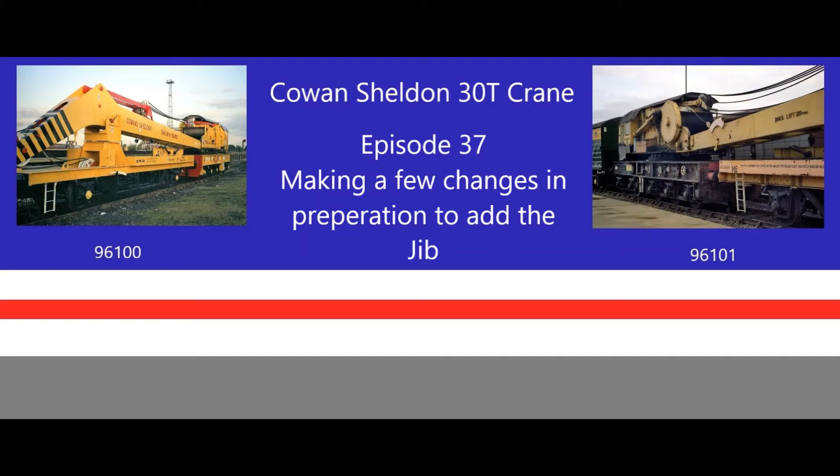In today's lesson I'm going to add, I think, one small detail left to add onto the runner wagon, and then we're going to start setting things up and moving a couple of things, changing a couple of things, so that we can start to look at drawing the jib.

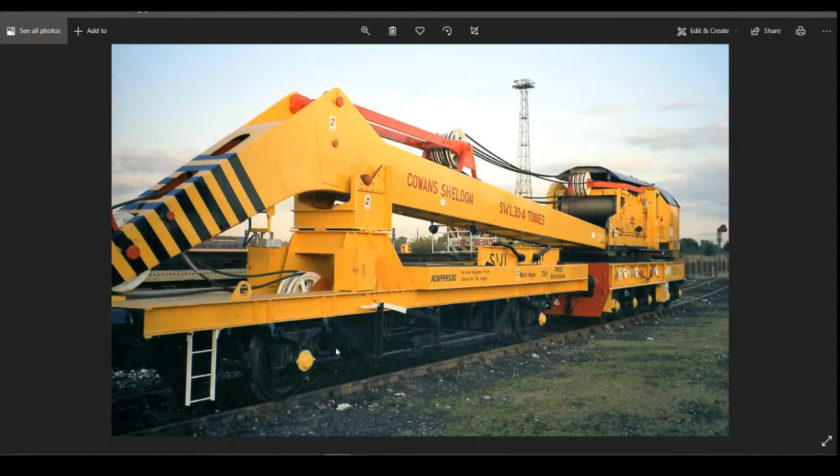So if we start with this small addition to the runner wagon, just up here there's a tiny little plate that the end of the jib sits on. I'm just going to draw that quite simply, making sure the runner wagon's turned on with the radio button, looking on this top surface, and then we're going to draw it. I don't know if there's actually... no, it's not on the sketch.

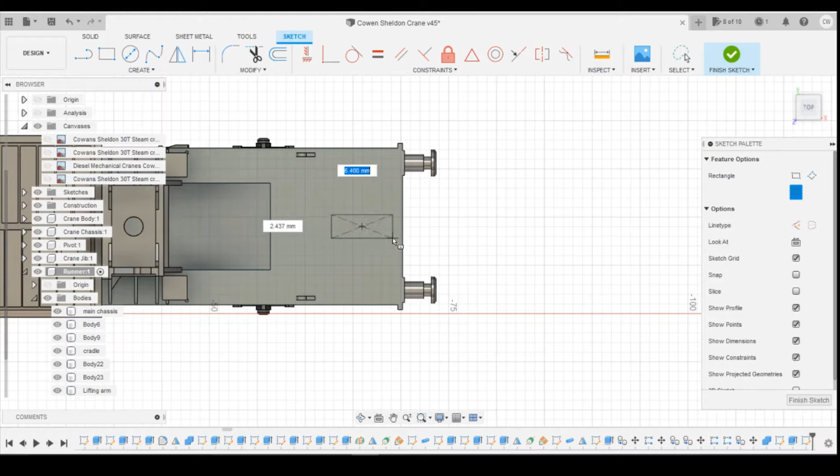So we're going to find the midpoint between these two, and then we're just going to draw, if we use a center point rectangle, something this sort of shape. Go with 4.5 millimeters by 2.5 millimeters, and then we'll define its position.

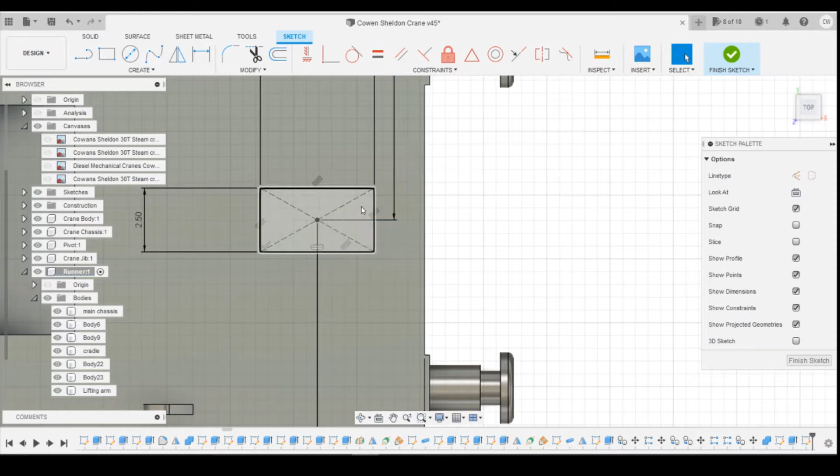Just extrude this up slightly. I think I'm going to go about 0.3. So that's a nice and simple little addition there.

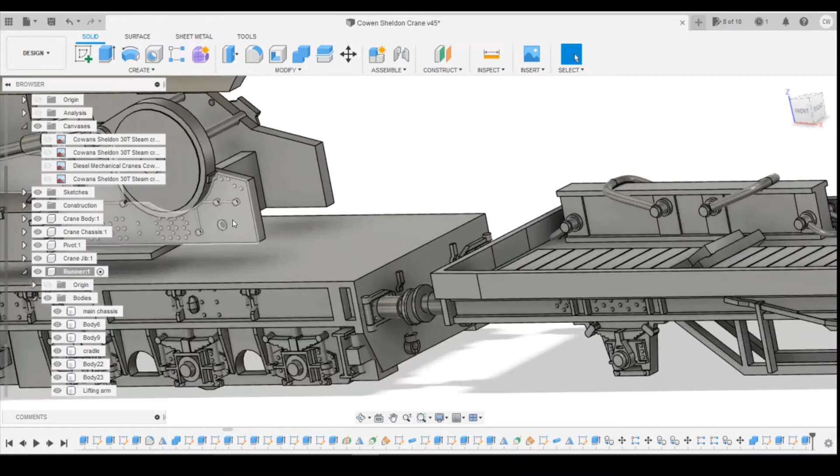Okay, so now the next thing we're looking at doing is, I'll say, setting things up for the jib. Now this here that we've drawn, this circle, is the mounting point of the jib. If we look at the plan, you can see where it's pretty much in line there. Underneath the body we've got like a slung down section here. And then obviously the jib runs across, and there's a little lug that sits in this like a catcher.

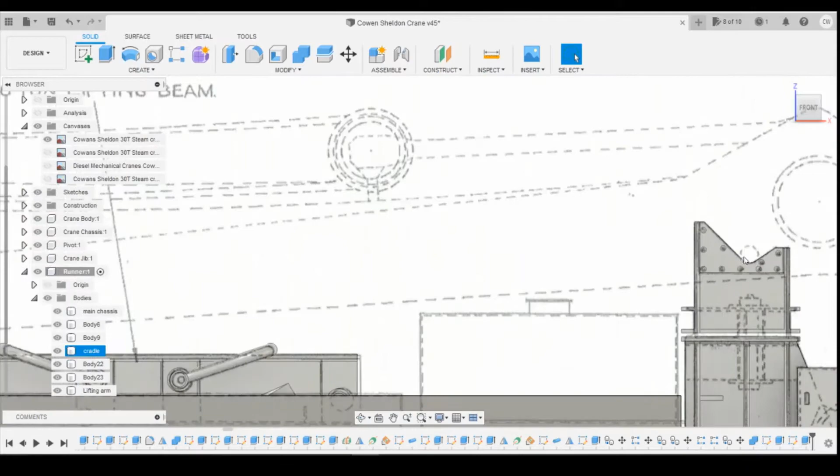Here that we've drawn. Now the issue that we've got, and the issue with the comparison between real life and modelling, is in real life these buffers are touching, which is where the plan is and how the jib's designed to sit. But obviously when we're going to look at modelling, we're going around much sharper corners.

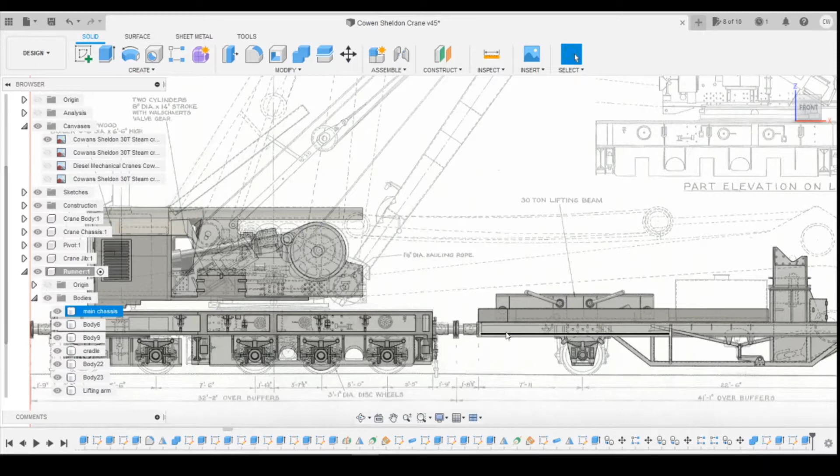We've got different types of couplings that we need to accommodate, so we're going to have to split these wagons apart and give ourselves a little bit of room between the two wagons, which unfortunately is a bit of a pain, but it's going to mean that we're going to have to extend the length of our jib, so it's not going to be a scale length to the actual model. So we're going to have an extra bit in this middle part here.

So what I'm going to do is I'm going to move the runner up by 5 millimeters. So I'm going to select all of the bodies within the runner component. That one.

Okay, let's edit this one before we do that. That should have been joined there.

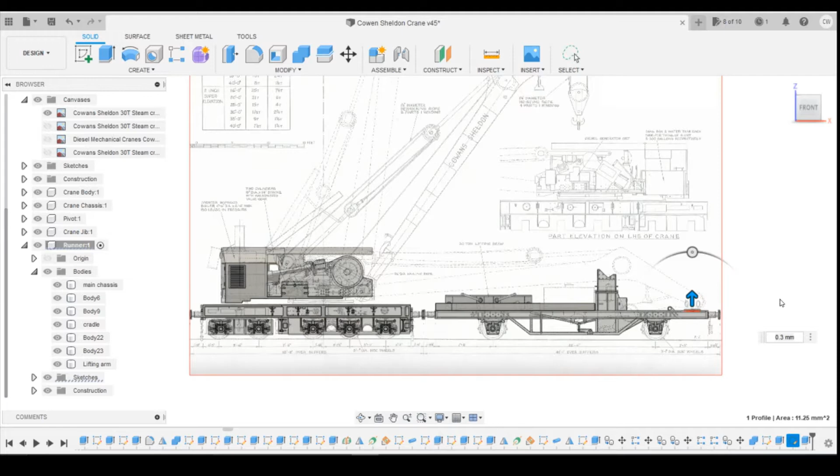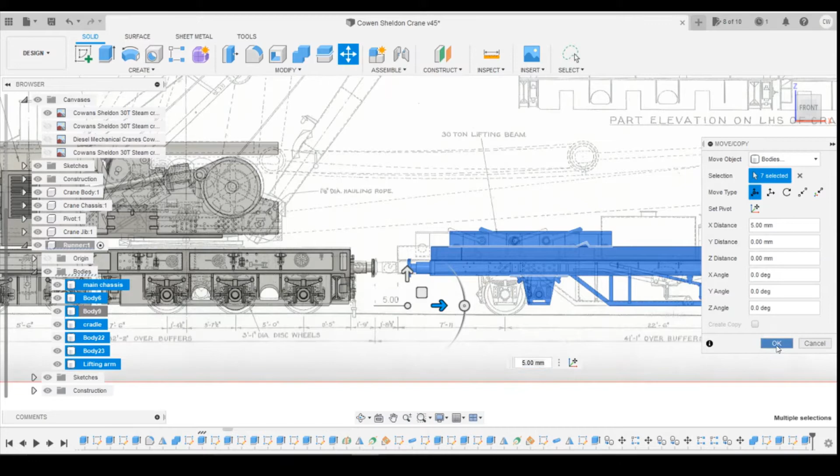Okay, so we're going to select all of these components, and then we're going to right click and then move. I'm going to move them up. I think that we're going to need about 5 mil separation, unfortunately, just so that we can have the swing to go around corners. And then obviously that's going to mean the jib's going to be 5 mil longer.

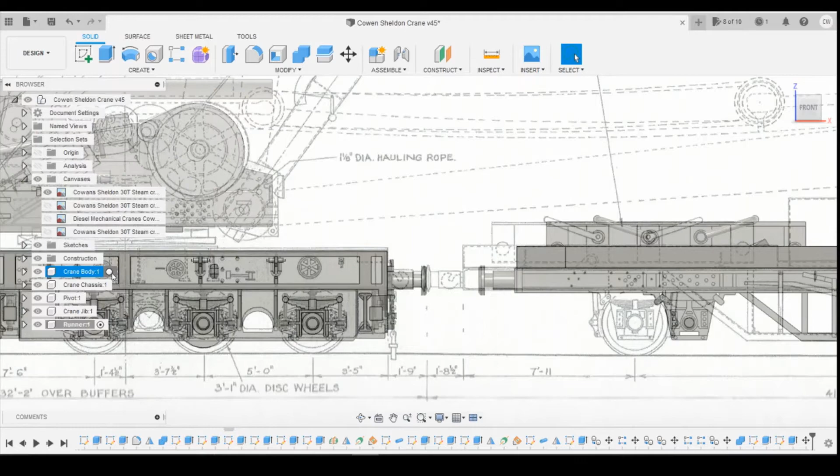Okay, so the next thing I'll do is draw these two bits on the bottom of the main cab body here. So let's select the crane body, and then we'll draw them.

Let me just tell you what I'm thinking with the jib as well. I'm actually thinking of not affixing it to the body here and not affixing it to the runner.

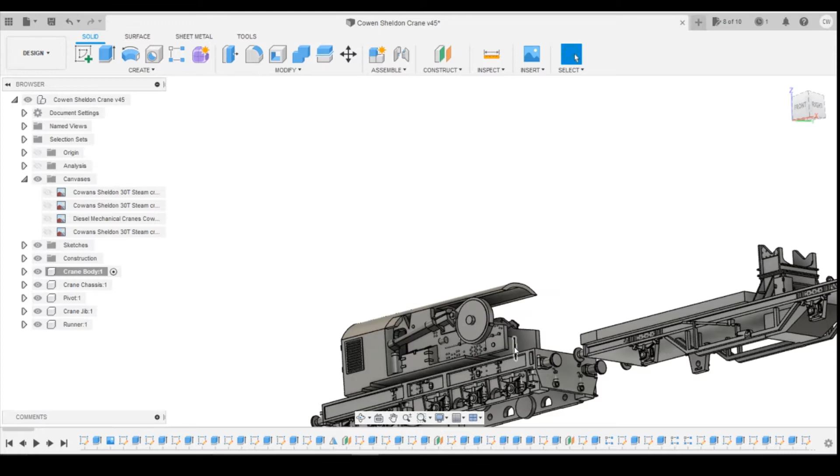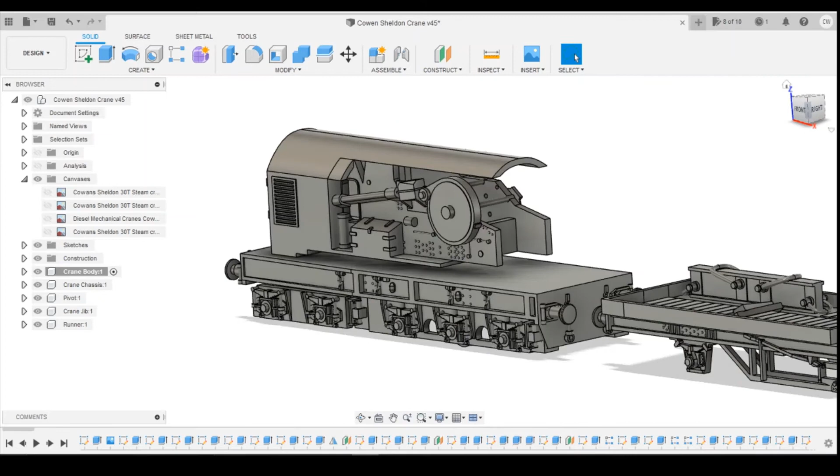Have it sort of floated so that as these two wagons compress and separate, it's not going to be putting the pressure through the pin that's holding them here, and it actually allows the jib to slide backwards and forwards within the body. I'm just thinking of having a little plate on the bottom here that's flush with this, and that whole jib can slide in and out slightly. It's not going to be able to move far enough that it comes all the way out, although if you need to, you could take it off yourself, but it's just enough to give it that little bit of play within the whole model.

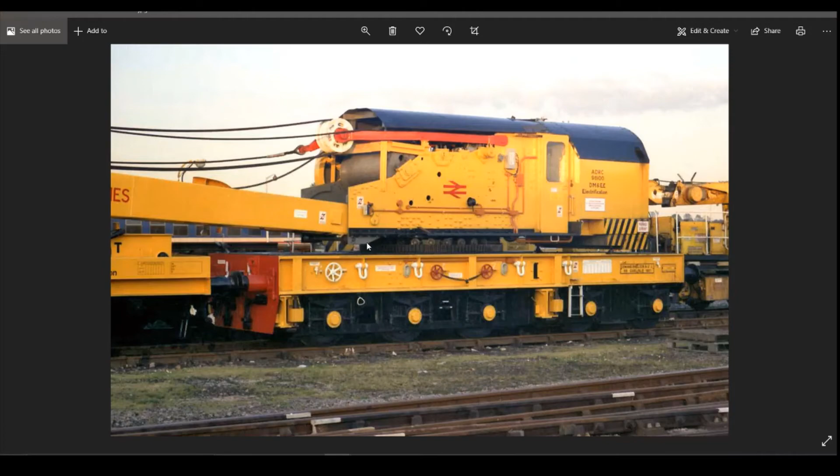Okay, so let's draw this little extra bit on the bottom here. I'm just going to create a sketch off of, if we look at the picture for reference, on the bottom of the body here. So we click the side of the body here, and we're going to use the line tool.

We're going to come down 0.9 millimeters, and then I want to come up roughly where this is here. I'm going to try and pick an angle that looks similar to what's on the drawing, about there, and then a line across there. Let's define that angle and define the distance between those 2 points.

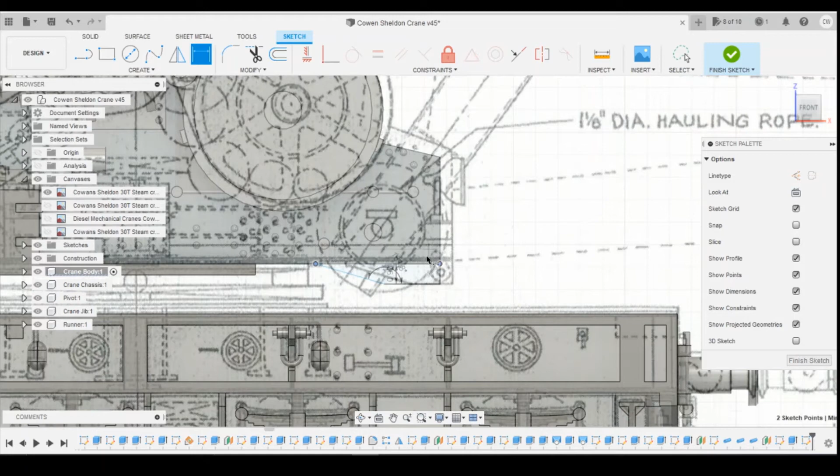Okay, and then in real life, this is just like a little plate where it hangs down, and it's hollow in between the frames here. But I'm actually going to, as I say, fill it all the way in so that we've got something for the jib to sit on.

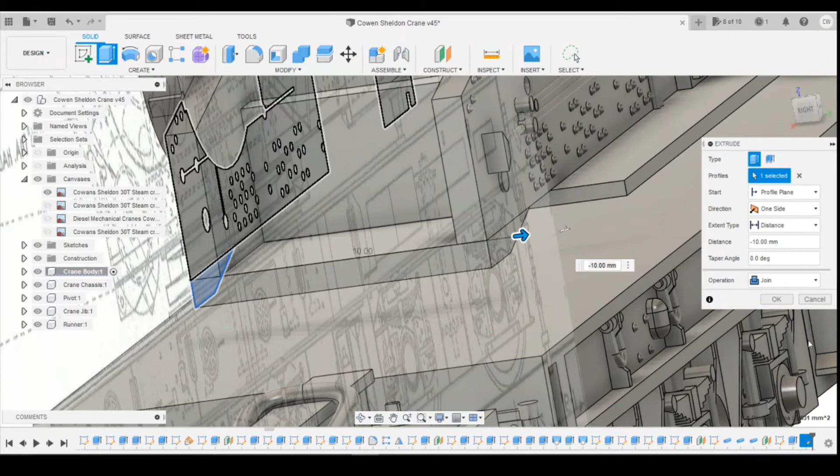So make sure you've got the radio button checked for the crane body, join, and extrude that across, and then the jib can sit in like a little pocket here.

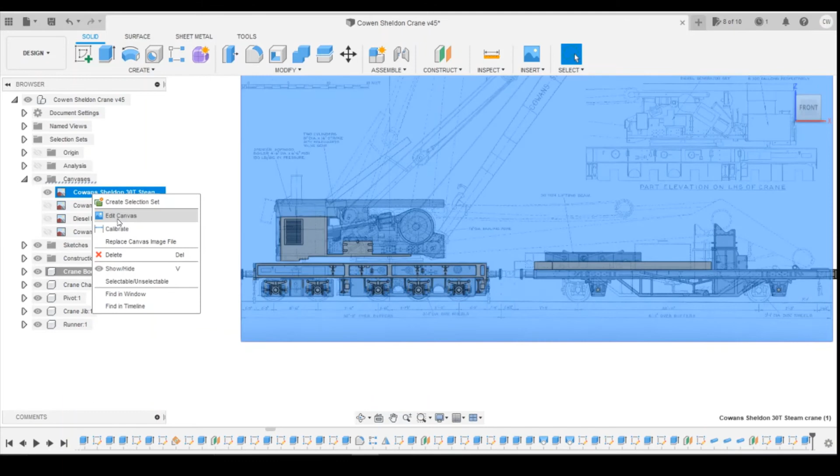Okay, and as I say, you've got a 5mm gap there. We're going to extend the jib by 5mm and draw it at pretty much the same angle. What I'll do as well, while we do the jib, is move this whole drawing across by 5mm, so all the angles here will be the same. We'll just have to make sure that the angle coming down from this pivot point across to here is slightly shallower to be able to sit on top of the body there.

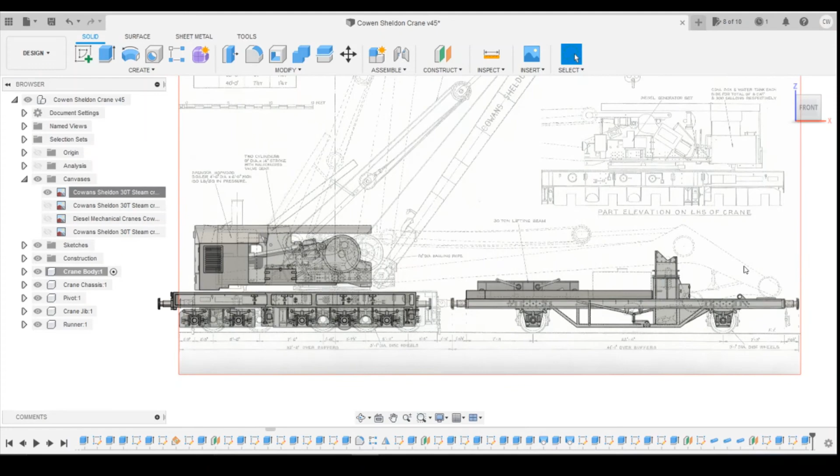Obviously, if you've got any comments or suggestions, you could drill out this hole here. You could extrude that all the way through, create holes both sides. You could put a hole in the side of the jib and then create that as a pivot point if you wanted to, and that's something potentially down the line I'm going to look at. But initially I want to have this floating jib here, so that the compression between the couplings allows it to move slightly but hopefully not jump out.

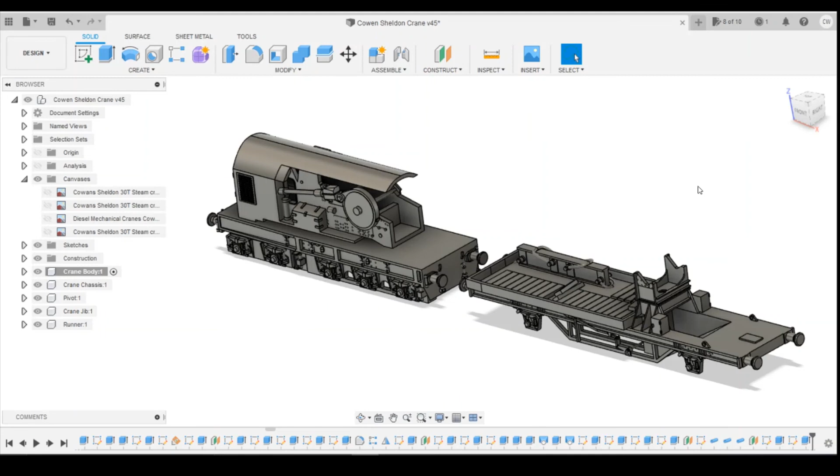Okay, so everything we've done there should put us in a position now where we can draw this jib. Hopefully you've got to a similar stage as what I'm at. If you have, then great. If you haven't and you've got any questions, please ask away, I'm happy to help. In the next lesson, we're going to draw that jib, get that all sorted, and then look at adding some more detail from that point onwards.